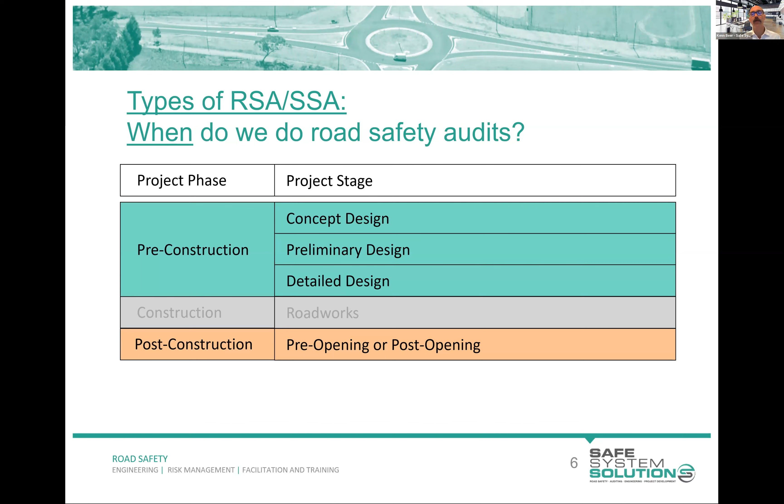And then we have post-construction. So just as it's finished, whether it's a road that's not open yet, somebody can look at it, or it's just opened up and you can look at that. So these early stage concept, or sometimes called feasibility stage audits, is where you get very high level plans. It's sometimes called the planning audit, and you're looking at these big picture things.

What's the alignment of the road? What's the intersection form, the interchange form? How are people from one area up the top going to get to there? How are people from up here going to get down to here now? Is that going to cause issues? It's pretty big planning level stuff.

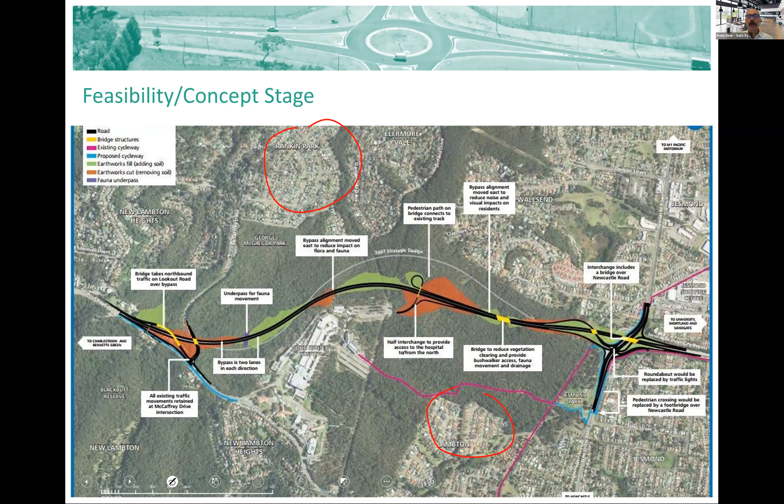Then the next stage of audit might happen when there's a bit more meat on the bone of a design, and you can start looking at some of the layouts, maybe on a survey base or an aerial base. And then you get into the detailed design, and that's where you get the full design set. So you get long sections, cross sections. So you've got the full geometric design, you'll get pavement design, lighting design, signs, markings, drainage.

There's a lot of documentation you'll get at this stage of auditing. And it's important at this stage of auditing, if you're not somebody who can look at those sorts of plans and understand what is going to be built and imagine challenges and issues associated with that, that you are part of a team that has people that can do that. It doesn't mean you can't add value to these sorts of projects, but just be aware of the importance of that.

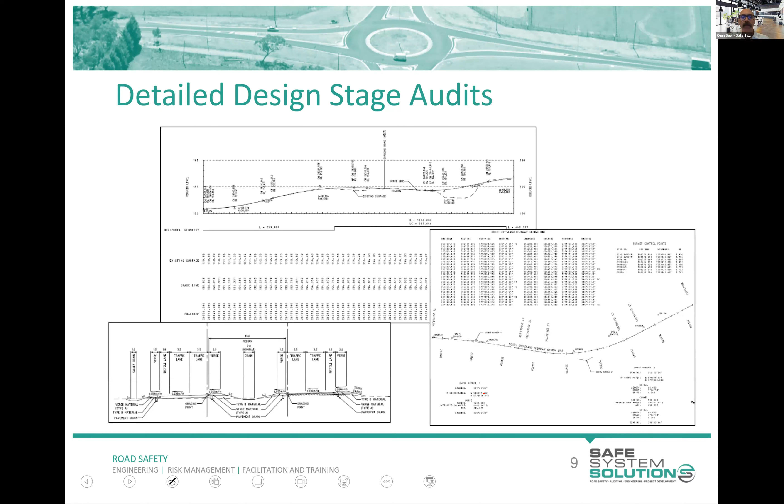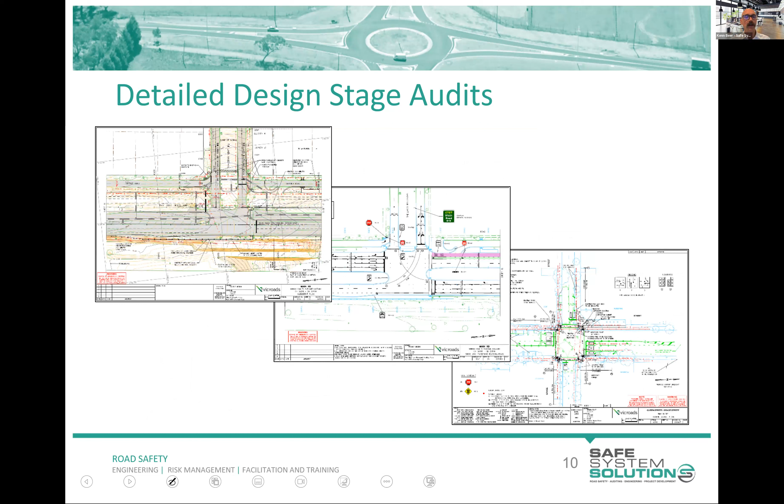And so, yeah, as I said, you get a whole lot of different plans that will come: signal phasing and signal plans and lighting and all sorts of good stuff. Construction stage, as I mentioned, New Zealand looks at this slightly differently. So I encourage you to be very across what is done during construction and checking the layout of a traffic management scheme.

But the audit process can be used, but it's far, far more than just checking conformance with standards and the code of practice, where signs should be set out and taper lengths and those sort of things. It's a fundamental look at the safety implications of a construction site. So things that aren't picked up in standards or guidelines, like if there was a KFC on this corner and people are here, they will get to their KFC one way or another. They want their chicken, right?

So we can't just say, oh, well, we've met all the code by blocking this off and blocking this off. We've got to think about how we are reasonably going to get people across to this or down this road. Are you going to divert people through high pedestrian areas, school areas? How's that all going to play out? So it's bigger than just where's the sign and the line.

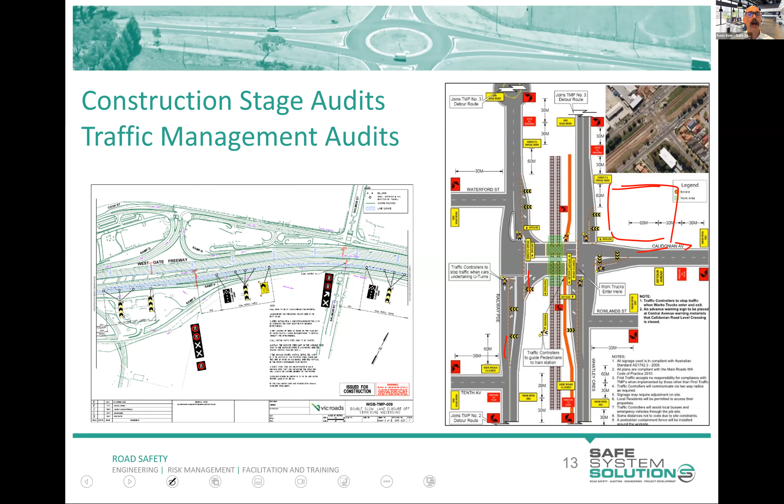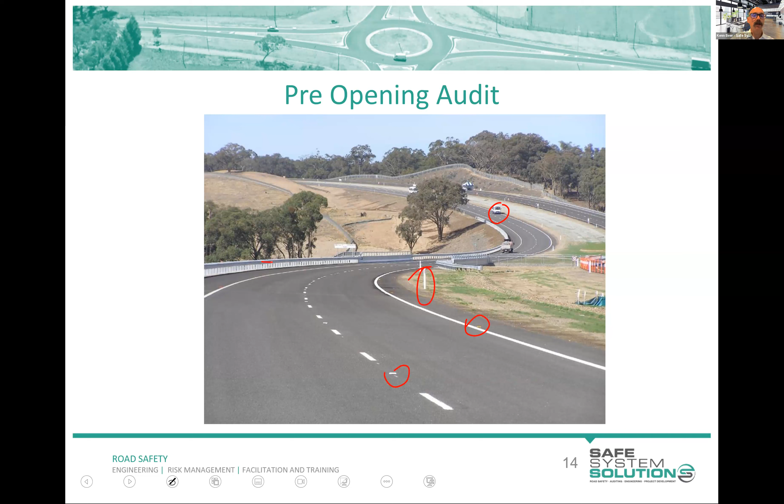Have they got the guidepost the right way around? Is the overlap of the barrier rails correct? Have they got the right delineators on there? Is the barrier the right height? Are the lines and signs correct? You're just doing that final check of everything to make sure it's all good. So here we go. Let's get you involved. They're just opening this road.

Left turn, oh gee, Kathy, this is a good group and it goes very quickly as to people putting it in there. I think we're going to give it to Chris on that one. Will and Chris again. And somebody's asking what image is currently up.

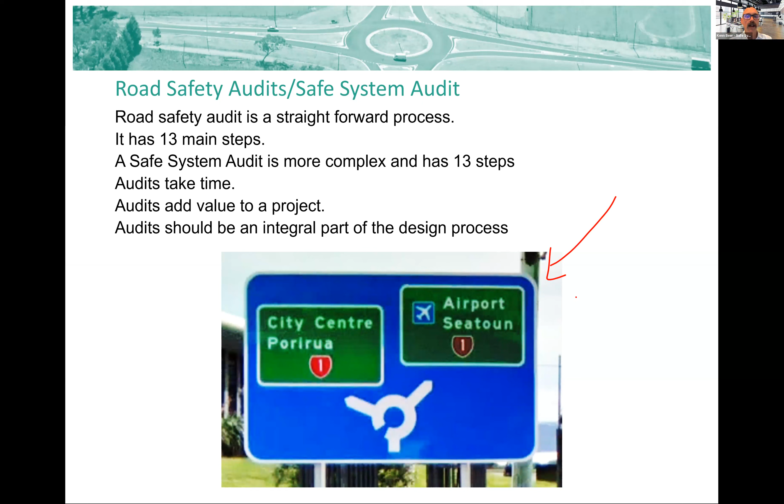Now, I talked a little bit about signs and lines not being the be all and end all, but here's an interesting one. Does anybody have any ideas on what might be a little bit wrong with that sign? And I'll come back to that. I'll let you have a ponder of that. I will come back to it, I promise.

Okay. So here are the steps straight out of the Waka Kotahi Safe System Audit guidelines. You can see the 13 steps there. So we've got starting stuff and the team selected. There's a bit of a briefing, commencement meeting, review of the documents, then a site inspection, and we always do our site inspection, debrief meeting, and this is a uniquely New Zealand thing, this idea of a debrief meeting before the report is handed over.

Usually the audit team will complete their audit, hand it over, and then there's a possibility for a meeting. But in New Zealand, there's the encouragement within this process to have that debrief meeting, number 7 here, where the audit team will discuss their findings and get some feedback and commentary from the project team and the designer so their report can be more useful to that team. Now, I think there's great advantages to that. Some people get a bit concerned about, are we starting to lose independence by that? But I think it's not too bad.

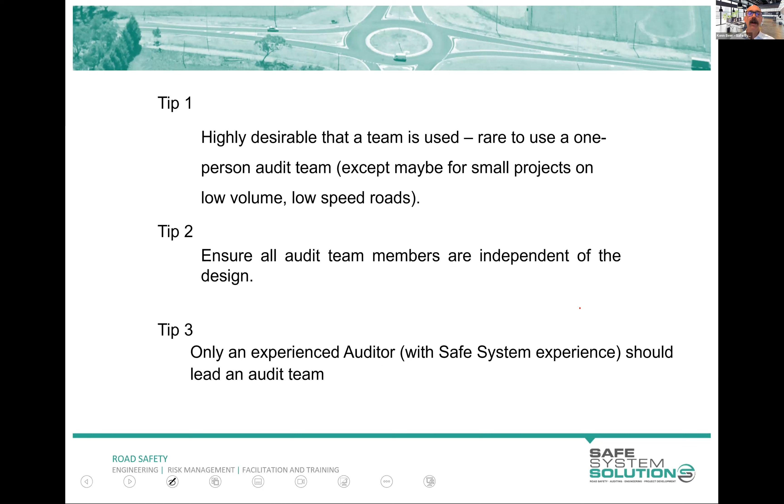There's often a question: can you do a one-person audit? The answer is pretty much no, but in very rare circumstances it may be okay, very small projects, low volume roads, but it's really quite discouraged. You want some sort of team to do an audit. We need to make sure everybody's independent; we talked about that last session in detail. Only an experienced auditor should lead the audit team, and they should have safe system experience, so they really understand the fundamentals of the safe system and safe system principles.

Ideally, that team has a broad range of skills and ages, males and females and others, and empathy. You want a really rich, diverse team. Interestingly, for one audit I put together, the team was us three. We're all male, about the same age, and we all worked in a state road authority for a long time. That's how we know each other, and we kind of see the road the same. So we asked Wendy to be part of the audit team, because she gave a very different perspective. She's not an engineer; she's a scooter rider, female, a bit older than us, and she questioned a lot of things and gave us a different view, which was good.

A lot of the time, to be honest, you don't have the luxury of finding all these people and bringing everybody together. You're on a timeline. You've got to do this audit, so you grab the people available to you. You try to ensure that, okay, this one's got lots of barriers and I'm not a barrier person, so we better get Fred, the barrier guru, on the team. Or this one has a lot of drainage stuff going on, so let's get Jess in, she's a drainage person. So build that team around the skills and knowledge that you have.

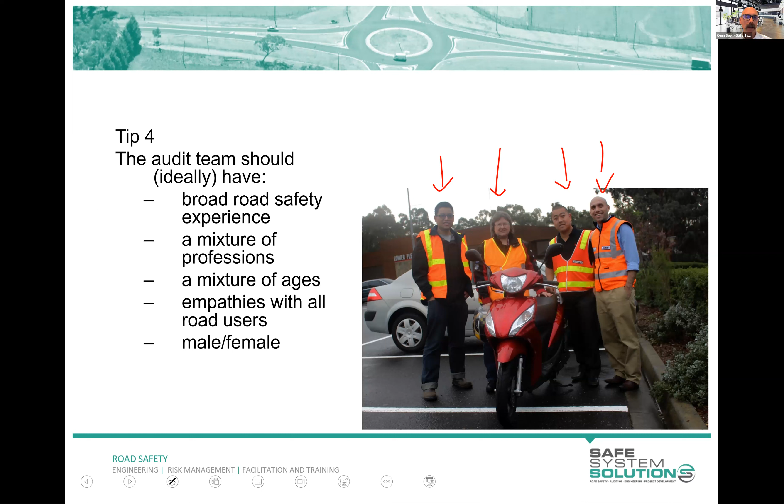Hand over the brief. So the client's got to write, here's what we want, here's all the information we've got, this is the stage of the project, this is why we're doing it. Some sort of commencement meeting where you all discuss that information and make sure you've got everything you need to be able to do that audit. Ask any questions, look at that background information, and then you inspect the site during the day and the night.

Sometimes I'll be looking at a road, for example, a new alignment of a road, and that road's not built, so you're standing in existing areas, and you think, oh, okay, the road's going to come around there. That's interesting. And at night, you think, oh, wow, I can really see how the headlights are going to glare into existing drivers at that point. And so it really can highlight some of the things at night.

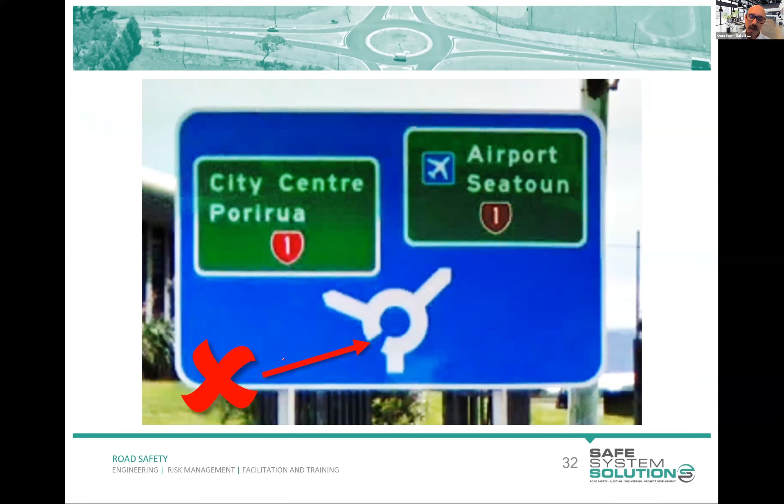Second one is, is this going to cause an issue? Is that sign going to cause all sorts of death and serious injury on the New Zealand road network? No, it's not. But it's wrong, so it should be fixed. And there are areas where it's a little bit more risky. I'm still not going to call it high risk or intolerable risk, but it's a little bit more risky. And it is around airports, around tourist areas.

Why is that? Well, here's one out of Wellington, because this is a very vivid example for me. You pick up your rental car from Wellington International Airport, and this is the first intersection you get to. So you've got to think, there's probably people coming in from countries that drive on the right-hand side of the road, that don't have roundabouts, don't really know how to use roundabouts. And this is going to be just a bit more risky for them. The reality is most of them will just follow the cars in front of them and work it through, and it's all going to be fairly low speed.

But the context and the situation is how you are starting to build up that profile of risk. You'll remember when we have the formula for how to write up the finding, we talk about the issue, and then we talk about the crash. We talk about factors that increase or decrease risk. That's the context. And this says, okay, this is out of an airport, it's more likely to have these, so there's more of a risk.

Kathy, were there any other questions I needed to deal with? Yeah, there was a question, Ken, about: does it mean the report, the road safety audit report, will be a live document for some time from stage 8 because of the interaction, because you're looking for the team's response? Yeah, that's right. So the report itself, okay, this is the New Zealand process.

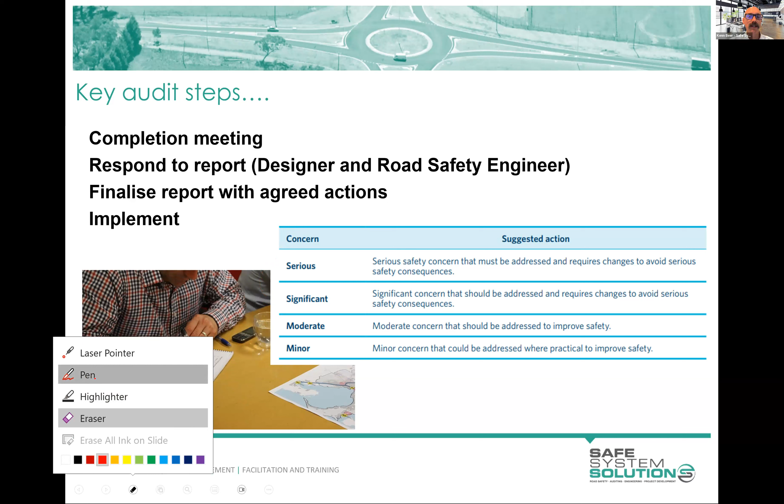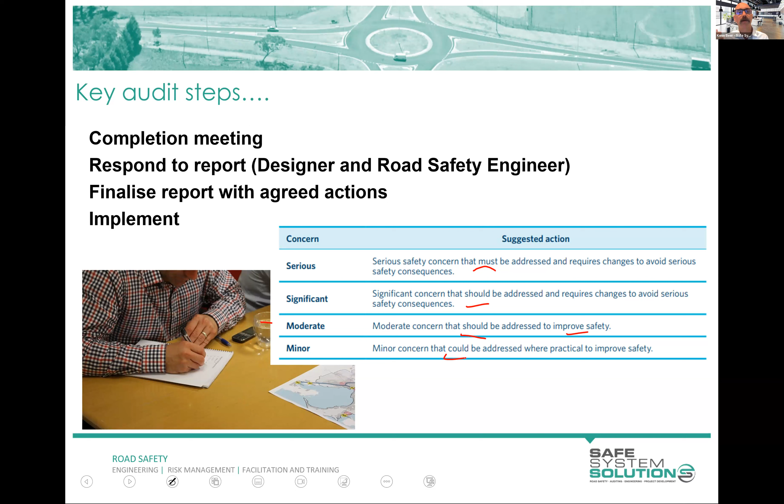But this is what's out of the guidelines document. It says, okay, if the risk comes out as serious, it must be addressed and requires changes that avoid serious safety consequences. Significant should be addressed. Moderate should be addressed to just improve safety. Mind you, you can't get a moderate without it being under the death and serious injury threshold, and minor could be addressed. There's just a little bit of help for those receiving the report.

Okay, the audit report's handed over to that project manager. Everybody should keep file copies. Got to respond in writing to the recommendations internally and keep a record of that. And it really has to be done. Very concerning if audits are done and just put on a shelf and never actually actioned and looked at. Yeah, just be aware those responses, even though it's an internal response, they could become public with freedom of information requests and the like. It's good practice to give a response to the audit team, but not required.

Okay, just a reminder here that if you receive a road safety audit report, its whole purpose is to help you reduce risk of that project, but it is your project and you decide what happens and what doesn't happen. The auditors have no legislative power. They cannot require you to do anything. They're providing you with an advice piece. That is it. But that being said, if you're going to not do something or not address an action, justify that. Put in a reasonable response. So if you get pulled into court to justify that, you go, well, this is why we didn't do anything.

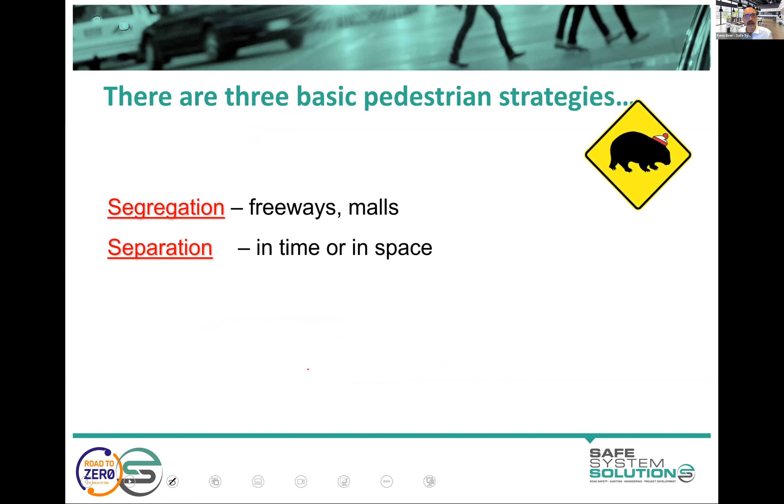We can separate in time or space, or we can integrate. We can share a space. So segregation is quite well understood. We've got our motorways. Pedestrians shouldn't be on there, although we do see a reasonable amount of death and serious injury on motorways for pedestrians.

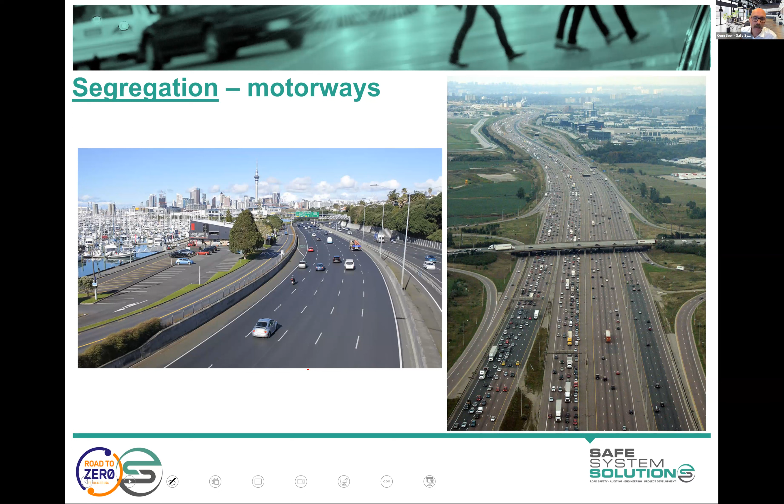It's often people getting out of taxis late at night. In my crash analysis on motorways it always amazes me, the amount of late night taxi exiting death and serious injury for people, just doing all sorts of, again, intoxicated style things, throwing up, or anyway. So that's something we still need to absolutely be thinking about.

But yes, scramble's the other thing it's known as.

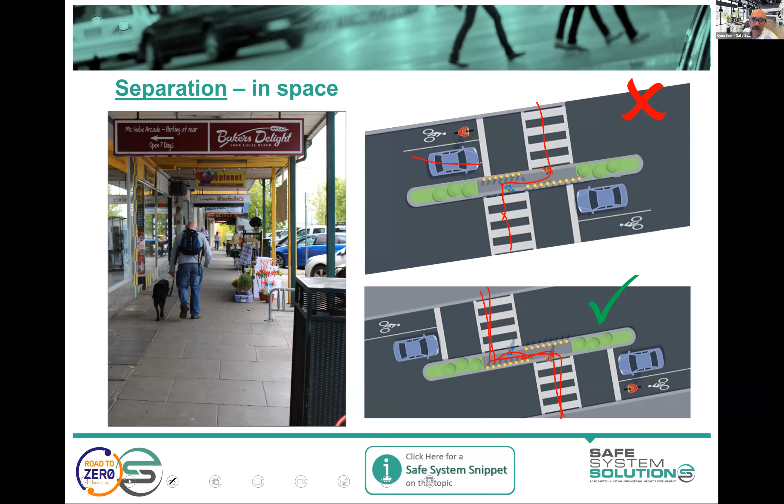Now, again, we've got some other fundamental issues we want to deal with, the speed of these vehicles and approach to the crossing and the like. But those are the kind of things that you sometimes pick up as an auditor, amongst other things, and the width of the crossing, refuges, and the like. And there's some debate about this diagram out of Part 15 of your guidance, about is it right? Is it big enough?

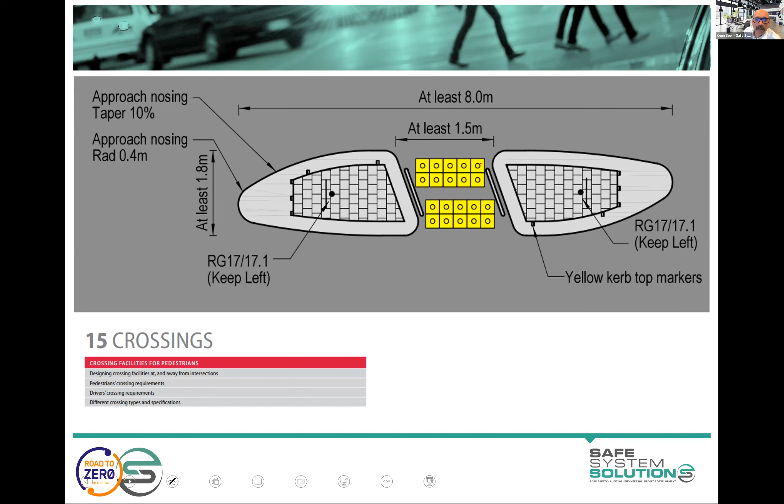But nonetheless, the easy rule of thumb for an auditor, because we're not absolutely caring about standards and guidelines, is it big enough? Is it wide enough for a father or a mother pushing a pram to be in there without having to stand themselves in live traffic or put their baby in live traffic? Or maybe a bicycle, is it wide enough for a bicycle? That's a good thing to think. Or a mobility scooter or the like, is it a good enough width there?

Another separation in space is pedestrian grade separation. And all I want to say on this is just be aware that this is not necessarily your ultimate solution for pedestrians, because they just won't use it. Some pedestrians might use it and you can get some benefit there, but just because it's there doesn't mean a lot of people use it. If there's an easier way across the road, a lot of people will use it.

And I talked about intoxicated people, and certainly the intoxicated are far less likely to be using some sort of convoluted ramping system like that, as opposed to just walking across the road.

And integration, so shared zones and the like. So one way I like to think about shared zones, it's actually based off some design guidance around shared zone design. It's a fairly simple sort of principle to follow. I'll let anybody type in if they can think of the principle. So if you're creating a shared zone, what makes a good shared zone? What is the principle you're sort of trying to achieve? Let's see if anybody's got any ideas.

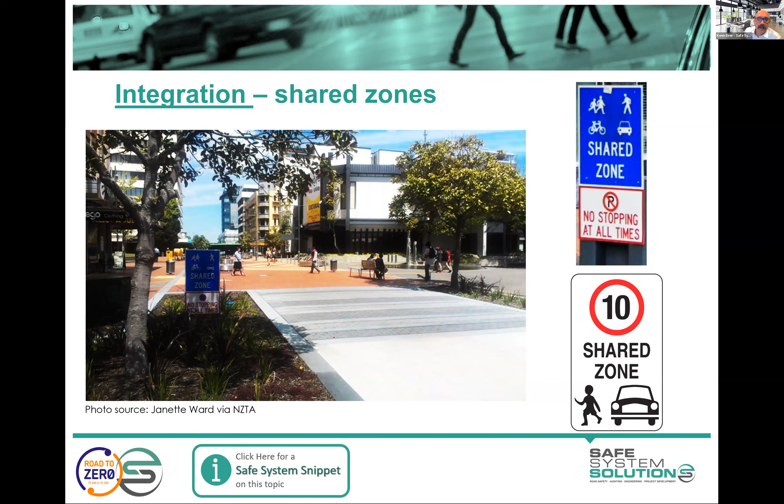Maybe the no obvious priority to one road user, ambiguity style things, because it's really to make it not look like a road. And so that's kind of that ambiguity. If it looks like a road, you fail. And a really good way is if you drive a good shared zone, you're going, am I even allowed to drive here? That's where you're absolutely in. And I think this one in Hamilton is actually quite a good one, because it really gives that feel. Am I allowed to be driving through here? It's very different. It does not look like a road.

Okay, let's get into some specific findings, pedestrian safety findings. And as I say, I'm just giving examples, some things that commonly come up. There is just huge amounts of stuff out there. Okay, so sight distance on the approach to pedestrian crossing. And that is something industry is a little unclear on, but people should be clear on it. If the pedestrian has priority, as they do in this case, the stopping sight distance should be achieved for the vehicle to pedestrian, and for the vehicle approach sight distance to the crossing itself.

Now, slip lanes are particularly problematic because where is the driver looking? Well, the driver's looking out to their right to see if they can put the foot down and go. And so we do have that pedestrian coming onto a pedestrian crossing and the driver not looking at the direction that they're traveling, and that whole scenario plays out poorly. And that's a good principle to think about as an auditor: where are drivers looking and where are risks coming from? So we have many options to alleviate that. Everything from removal of the slip lane to raising of the crossing, signalisation of the crossing, and reconfiguration, opening up sight lines, all sorts of things can improve.

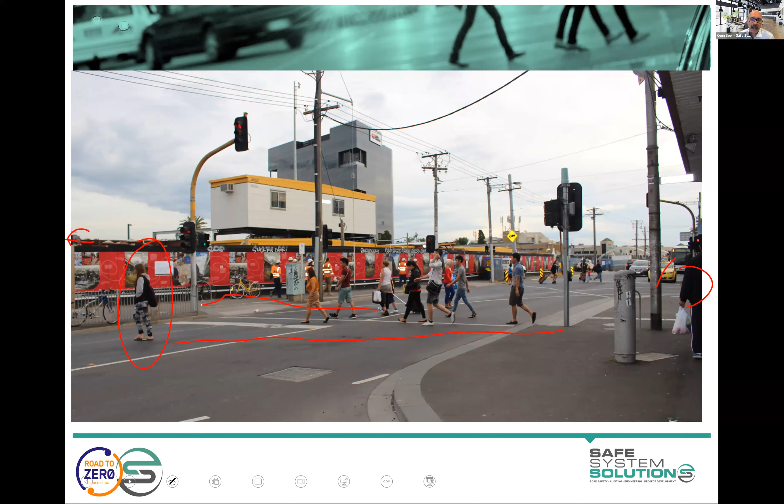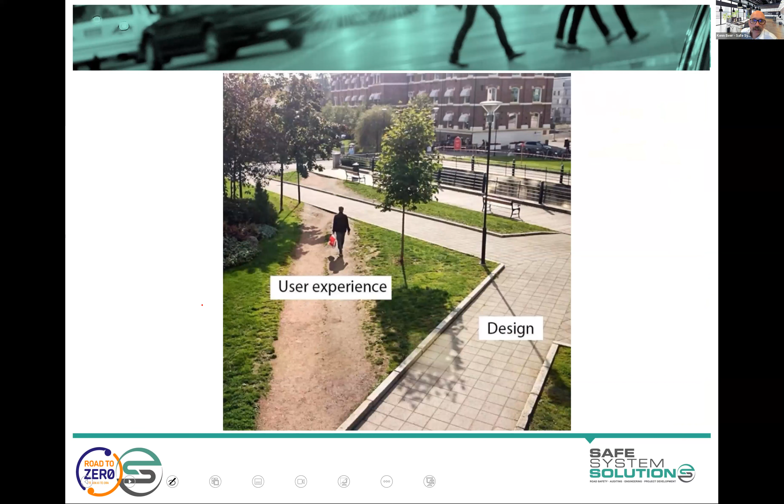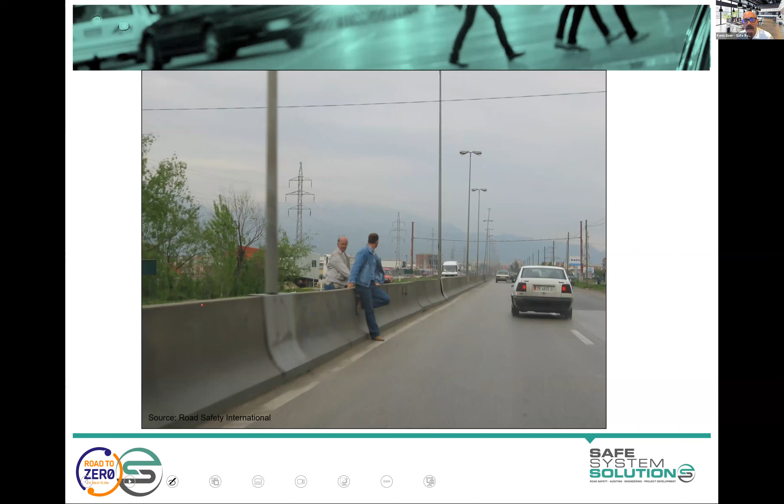So there's another way to describe pedestrian desire line, user experience versus design. So we've got to think about that. This one Kathy took to show it, pedestrian desire line back there. As I say, pedestrians will go where they need to go. We don't see a lot of this in New Zealand anymore, complete segregation of the community. So maybe there's the residential on one side, all of the commercial on another side of a major high-speed road without pedestrian connectivity. But at these early stages of audit, you want to be thinking about that sort of stuff.

And it's funny, somebody's popped in there, courtesy crossing. It's that idea that this is a good spot and everybody should be slowing down and being courteous. I don't like courtesy crossings. I like being clear with who's got priority. If you're going to go for a courtesy crossing style thing, you can make a full shared zone out of it, or just make it a pedestrian crossing.

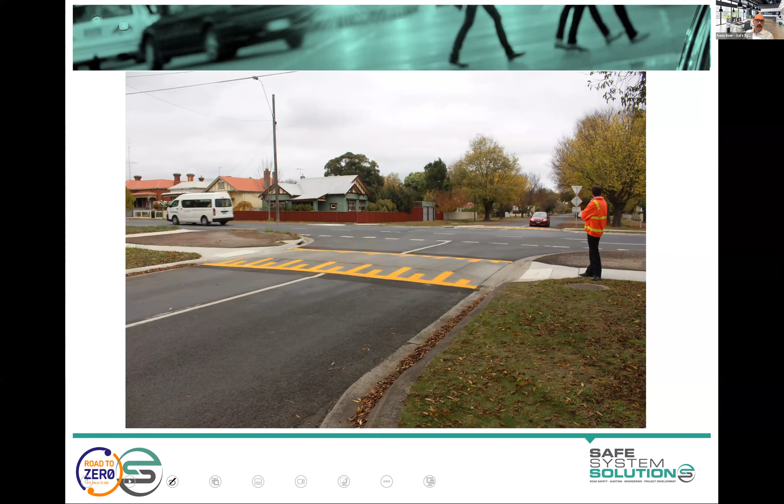This one again can be a little bit confusing as to, is it a pedestrian crossing? Is it not? It's not, but it's got some characteristics like that. And so again, it would just be nice to make that a formalized pedestrian crossing. If you're not going to have pedestrian crossings, there are ways to do raised threshold treatments that don't confuse. I think that's fairly clear that the road's through there and the pedestrians should be very alert and not have priority.

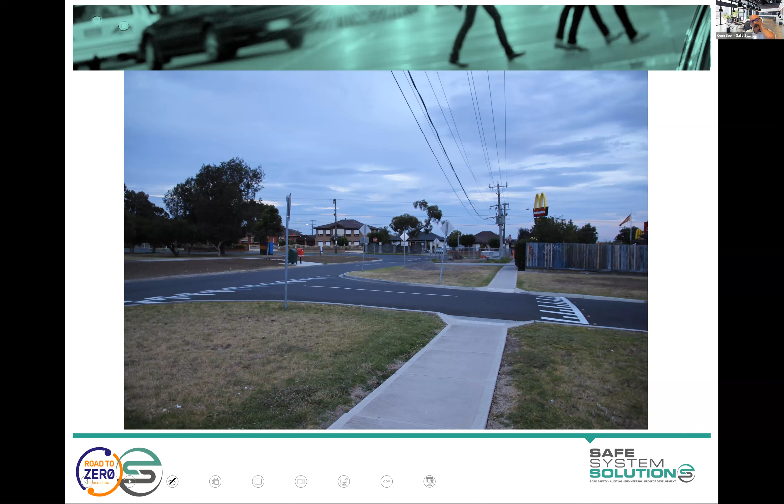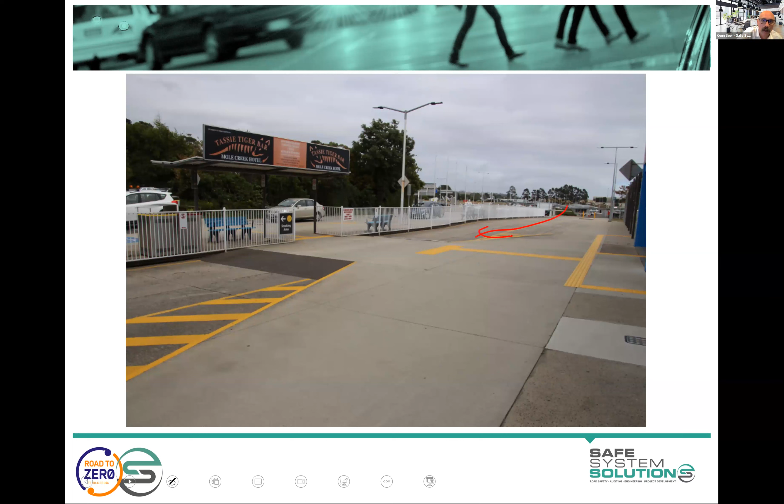That's not a bad one. Airports are a big source of all sorts of road safety audit course content for one reason or another. But it's very confusing here as you step off a plane as to who's got priority. It kind of looks like you're walking out there as a pedestrian, but occasionally cars come through here, and technically they have priority. The raised platform's going to help out a huge amount in this, but it could have been very clear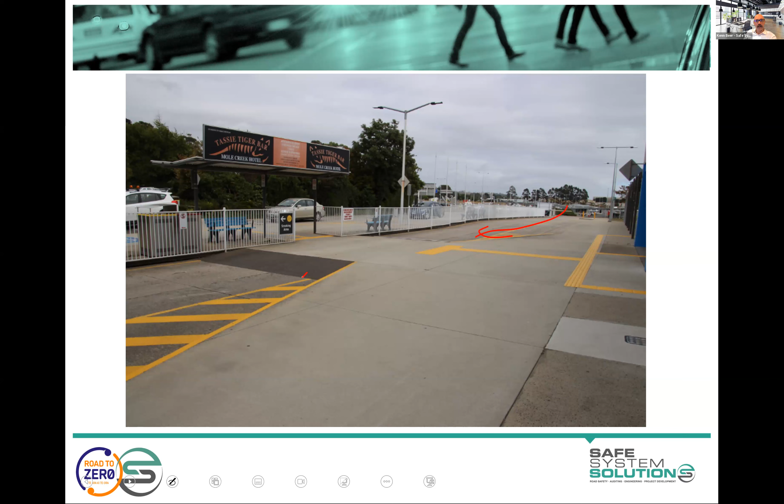and very obvious. And again, that courtesy crossing, as mentioned, I don't particularly like it. Just formalise it as a pedestrian crossing. We want vehicles slowing down and stopping for pedestrians. Just formalise it. Formalise it like that. And then again, we'll pick up lots of little issues.

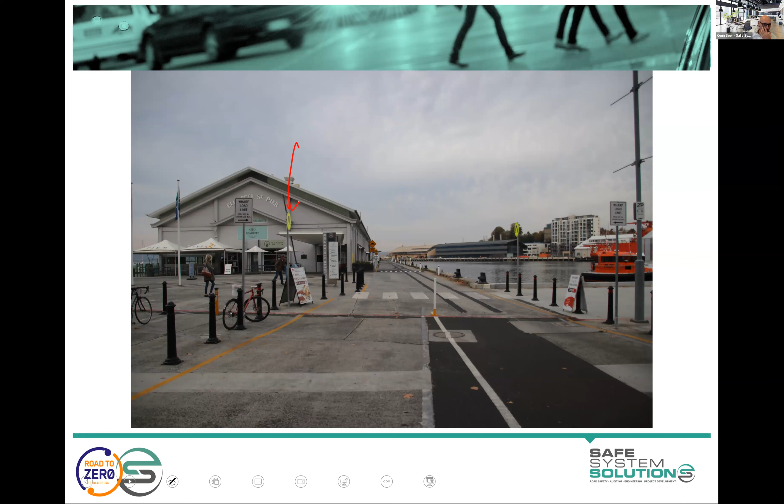This one, post-opening, looking at pedestrian crossings in Hobart, Tasmania. The sign installer, for some reason, thought that the pedestrian leg signs, which are used in Australia for pedestrian crossings, should point to the pedestrian so they know where to cross, rather than to the vehicles, to show them it's a pedestrian crossing. So that's how they were installed. So again, post-opening stuff.

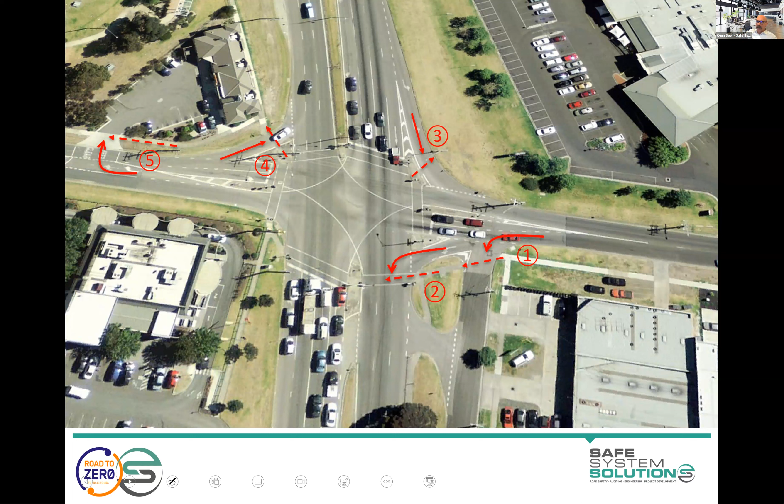So, Kathy, hopefully our poll pops up. Otherwise, we will revert to the old thing. Now, you can grab the poll box and move it around if you need to look back at the screen, and we'll let people have a bit of time to have a think about that. And Kathy, have I missed any questions that have come in? Or any pertinent comments?

Ken, yes, I think, oh, you did get a few bless yous earlier on too, which I didn't pass on. But we're all relieved, and I'm sure you're relieved too.

And now a question that came through earlier, right at the beginning, which I missed. Can a safe system assessment be separated from the safe system audit in New Zealand for the purpose of assessing options at the start of a project? Yes. Yes, it can. So the safe system audit in its totality is the preference of where people are going.

But at the early stages of a project, the more important part is thinking about the fundamentals of the project. And as you go further down, you're going to get into more details. And the safe system assessment component is really helpful in those early stages and loses its value down the track, in my opinion. So yes, you could just start with that safe system assessment component.

Yes, the answer is yes, you can do that. It will aid your project. Just be aware though, if Waka Kotahi is funding you and they've required you to do a safe system audit for a project, you may just have to go through the full exercise anyway.

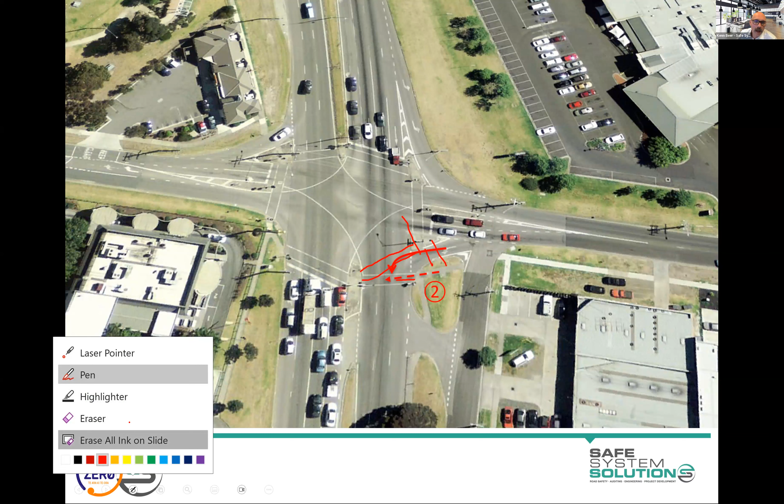Now this is irregular. Crossing should go to there and then there for exactly this reason. Because if you're out there on site, what you notice is there's a particular time where the driver is looking out there, the cars have all stopped because they've got a red light, but that's also the time that the green man is going for the pedestrian. So the pedestrian is walking out, the driver's looking out there, and the turnover happens there.

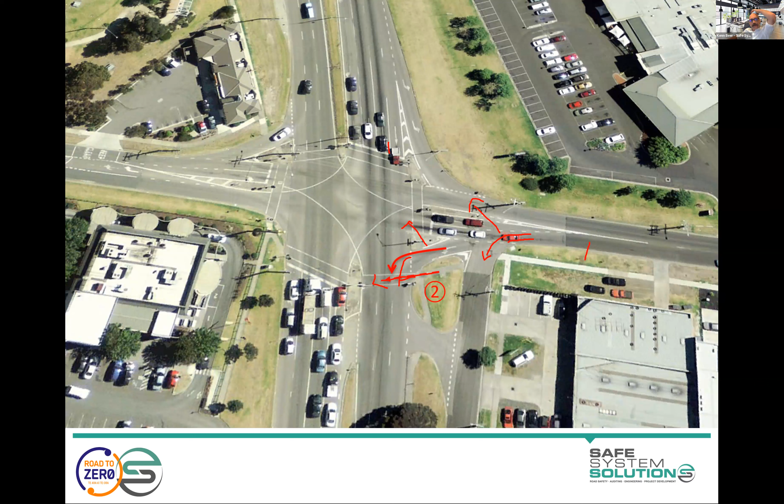So I should say, one is not great, but the driver isn't looking out there to make this turn. And they're probably going a little slower just on the angle of it. Anyway, our challenge is to try to identify this sort of stuff before it's ever built.

And that can be pretty confronting. And this is a real world example of where getting it wrong costs people lives and serious injuries. And our role is to identify this. But don't get too overly concerned you're going to miss this sort of stuff, because it's a process you go through. Again, you're going to be in a team and you're going to have an experienced auditor with you who's going to help you be able to identify these things quite quickly.

But what I do as an auditor, when I'm looking at a plan, I would say, okay, I'm driving up here and I want to turn right. And I'd be imagining this. I go, I wonder what I can see here. Okay, can I see my signals? And I look at the signal plan and I go, okay, they got a mast arm there. What if there's another vehicle? What if there's a truck in here? Would I still be able to see a signal?

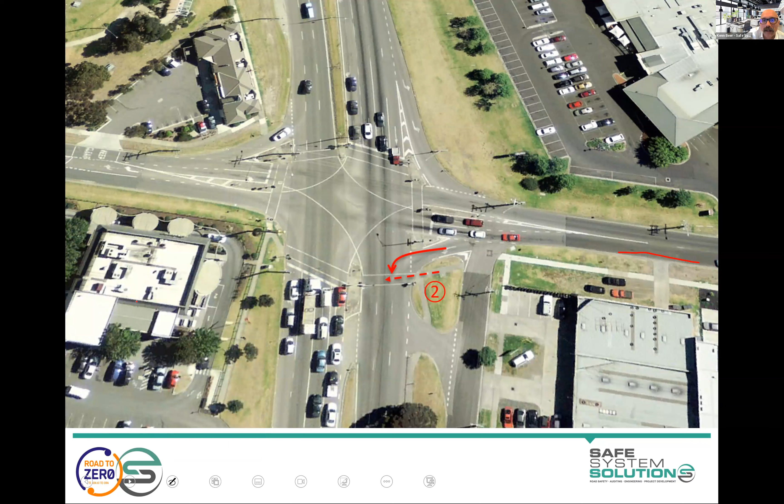And then I'd be saying, okay, is it clear where I go? If I want to turn right, is there a clear right turn area? Yep, good, that's all good, I can see that. I go, okay, I'm doing my right turn. Can I get around there? Are there going to be pedestrians crossing here? So I'm thinking about all of this for a right turn. And then I go, get in here. Is it clear where I go? Will there be other vehicles? Are these vehicles going to come out?

Go, maybe I go too fast. Where do I go? Am I going to run off the road here? What's the camber? I do a little bit of the geometrics of intersections in terms of your cross falls and your turn angles. Might have a look at that.

That's all just for the right turn for a vehicle, because then I'd go, okay, I want to go straight now in the vehicle. Same thing, is it clear back here where I go? Do the lanes line up? Am I getting it straight through? Am I going to be confused? Am I going to go into here? No, that looks all pretty clear, straight.

I'm okay with that. And you do this not only for all the vehicles doing all of their movements, but you do it for all of the bikes coming up here, pedestrians crossing at different locations. And so you'll eventually get to, okay, I'm driving up here, I'm doing a left turn. Okay, I'm coming around here. Is it clear where I go? Yep. Or maybe it's not.

Do I go in here to do my left turn, or do I go here? Okay, a bit of confusion already there. And I think some of you are already picking that up. And then you go, okay, I'm looking now here. Okay, I'm looking right. Yep, looking right. Okay, and I'm going, oh, hang on. Why am I turning onto a pedestrian crossing? That's a bit odd. How's that going to play out? And that's where you start to then hone in on that. Say, what's going on there?